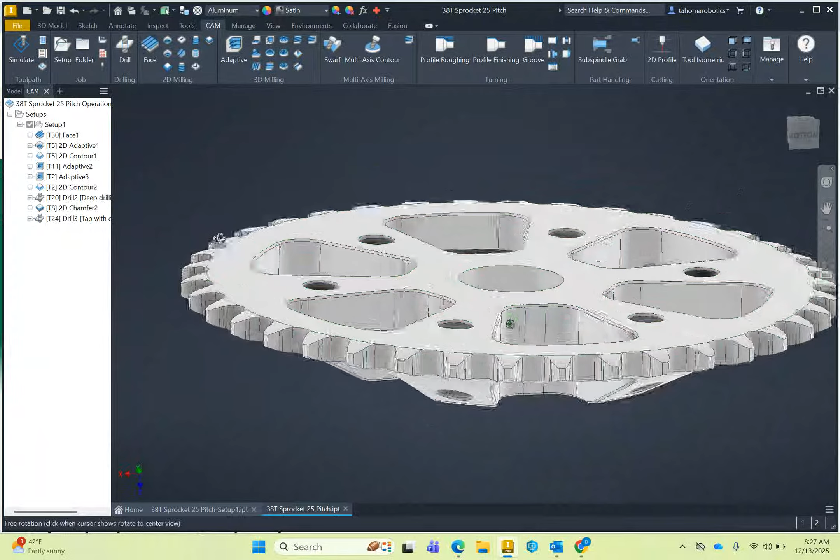The final step in finishing this setup is to get this curved profile on all of the teeth. This is done through a 3D milling operation called a scallop. You can kind of see what it would look like. It just will go around in a circle.

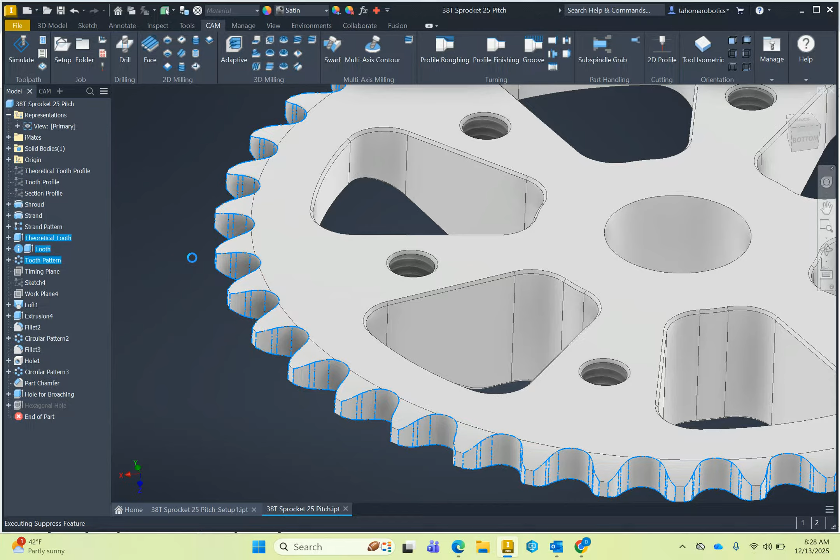But to make this possible, we need a model that does not have the gap between the teeth. And so what we're going to do is go back to the model, and we're going to find the sections where the teeth are actually cut out, and I'm going to suppress them. So I'm selecting these three with a control left click, then I'm right clicking and then hitting suppress features. And that removes the teeth from the model.

And then we're going to go back to the cam tab. Notice it messes up all of the other operations because the teeth are gone. We will fix that later.

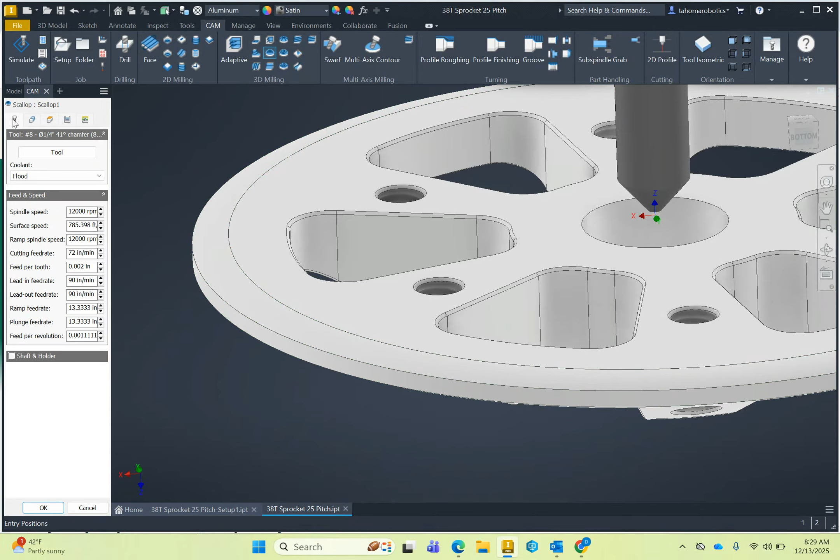Now we're going to go to the scallop, and we're going to get a ball end mill to cut this shape. A ball end mill has basically a spherical end, and so we have a 1/4 inch ball end mill that we'll find. I can't remember what tool it is, but right there, number 6 on the 2026 library is the ball end mill. It's 1/4 inch in diameter, and we'll select that. The speeds and feeds, again, are defaulted for aluminum, so you don't need to change that.

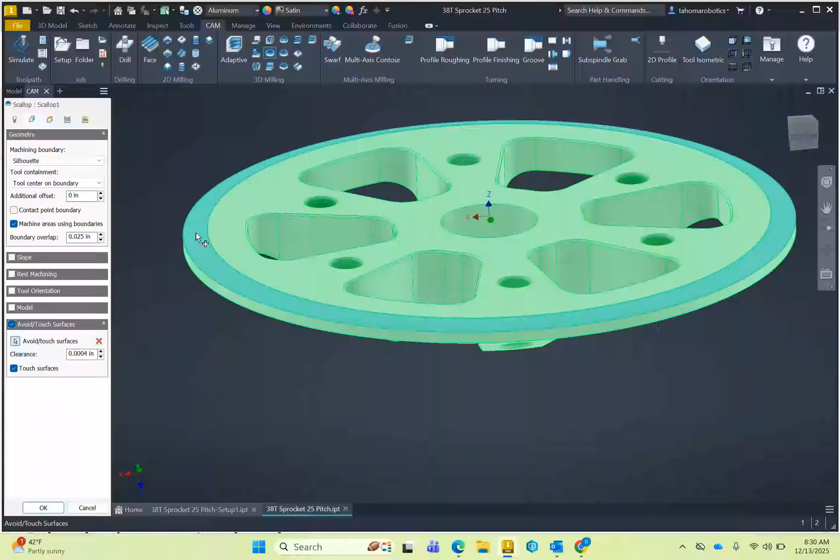We do need to select just this edge, and it's a little bit of a pain to do that. We're going to go avoid / touch surfaces, and then we're going to touch a certain area right there. Okay, so we want to basically machine that part. The depth is not going to go any deeper, even though it says model bottom. It's just going to machine this part here. We don't want any stock to leave.

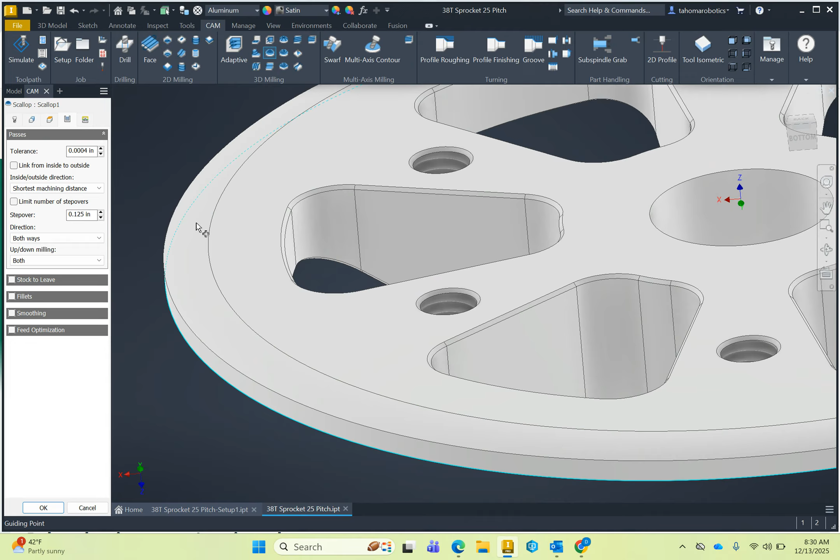We do want to look at our each individual step over. Right now it's 1/8 of an inch, which is a huge step over, and it would leave very discrete steps. The smaller the number, the finer the step. If we do like 10 thousandths, that's a reasonable step over, we should be okay. And so I'm just going to select here, and we'll see what this looks like.

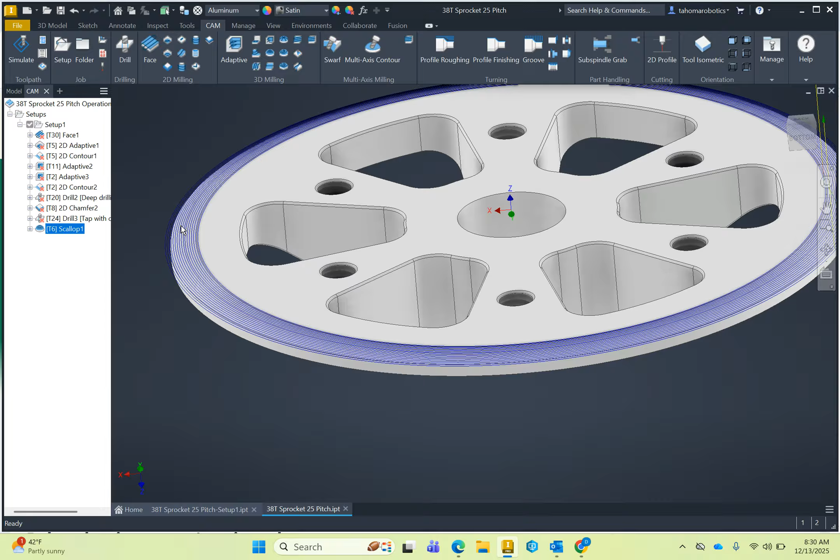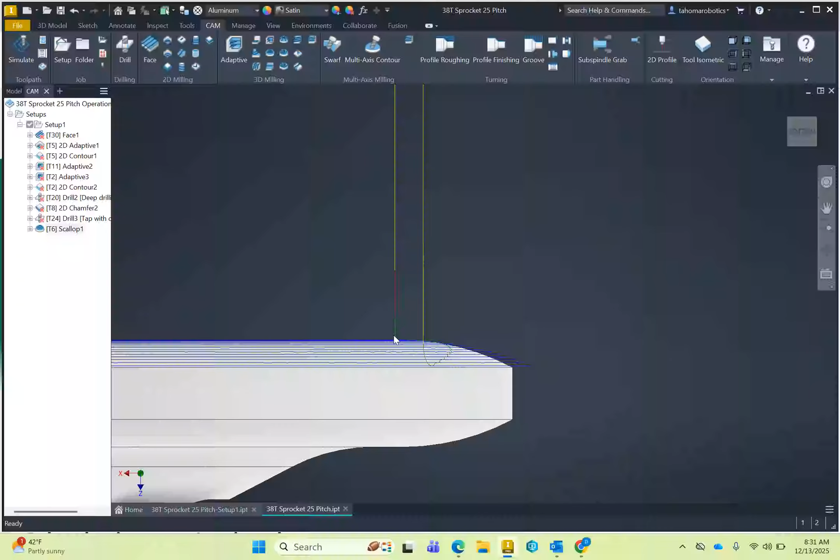So you can see that the tool will come down, make these circular paths all the way around, and step over 10 thousandths of an inch. And it's stepping down at the same time to follow that path. Kind of hard to see. I'll get a side view so you can kind of see the tool path. Now, you can get it finer, but that would take longer. If you had like a 5 thousandths step over, it would take twice as long to machine, but you would have a finer edge. I think the 10 thousandths step over is sufficient.

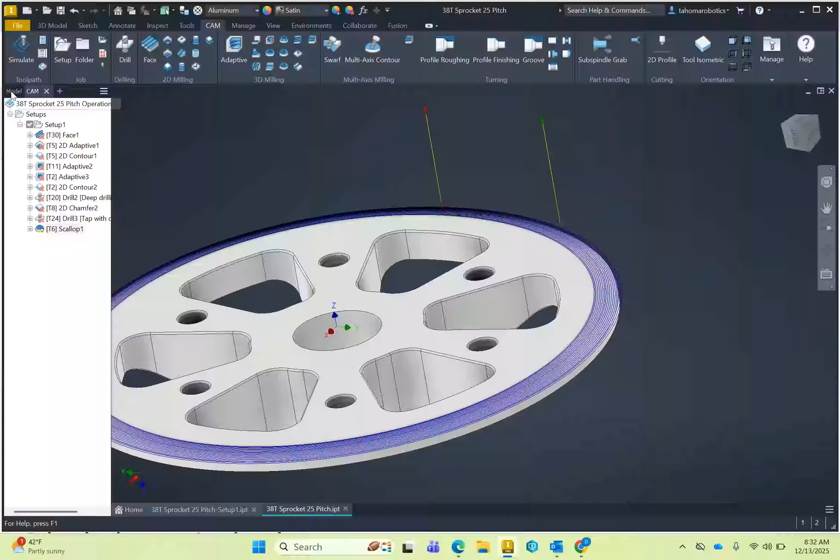Now, the problem that we're dealing with is all of the other setups are messed up. And so what we're going to do here is select this, right click on it, and go protect. What that does is, even if we change the geometry, because I'm going to go back to changing all of the teeth, it will not change this particular operation. So now we're going to go back to the model, unsuppress these.

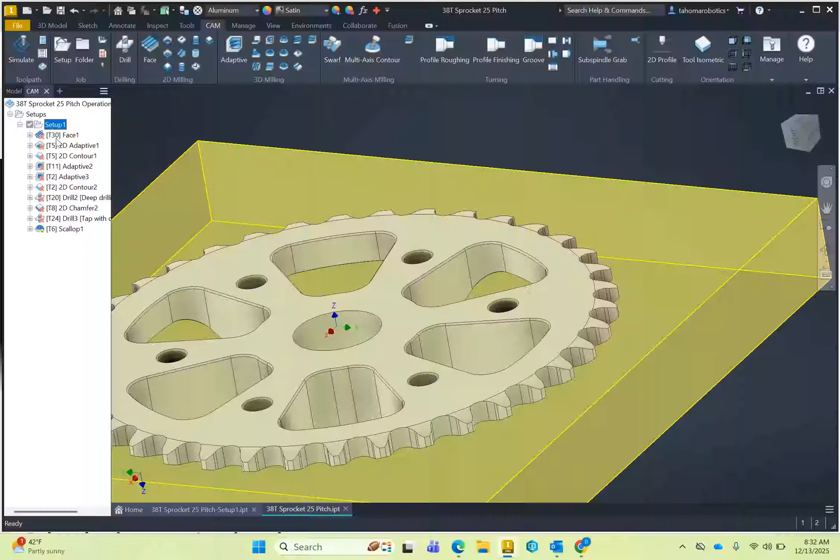So right click, unsuppress, and then we'll go regenerate. It may give us an error, but we'll just hit accept. Shouldn't be any problem there. It looks like we're fine. So I'm going to go back here, regenerate everything. We're not regenerating this, so you could actually just select these to regenerate. And then we're set to write the G code and then take that to the machine for setup 1.